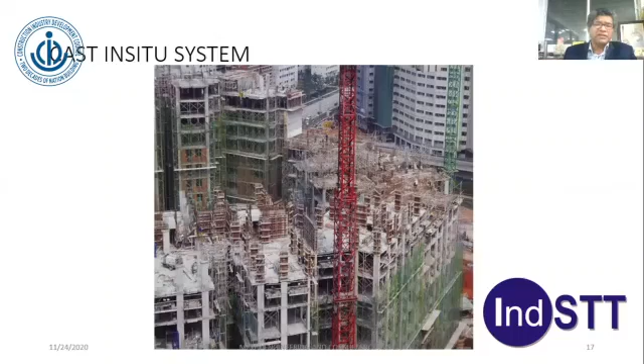Now we move on to precast prefabricated construction. If you look at the cast-in-situ system, you see a lot of congestion happening at the site with formwork everywhere, so much formwork everywhere that you need to do.

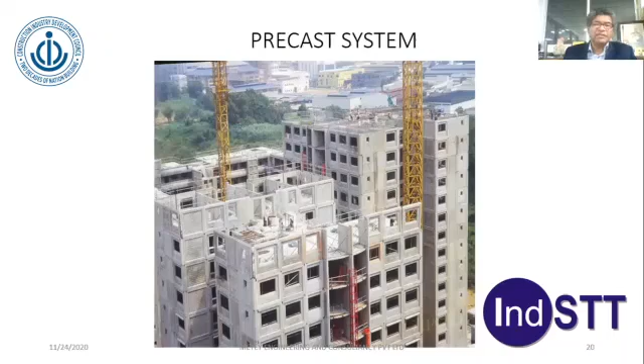But when you look at the precast system, there is no formwork at all, because all these elements are made in the factory and then come to the site and just get erected with the help of small supports here and there.

Looking at precast abroad, I was in Dubai in 1995, and at that time there were only 3 precast companies. I left Dubai in 2005. From 2002 to 2005 huge construction took place, continuing up to 2010 in a big way.

The 3 precast factories increased to about 20 precast factories in the Middle East, and huge construction took place. All those buildings were constructed predominantly using precast, most of them. You can see the facade elements are also in colored pigment concrete, used for the construction.

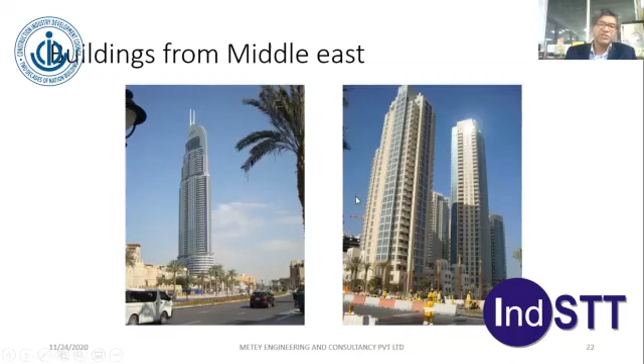You can see mushrooming of towers in the Jebel Ali area towards that side. You can also see industries abroad in Europe especially using even precast for the industrial process, also in concrete.

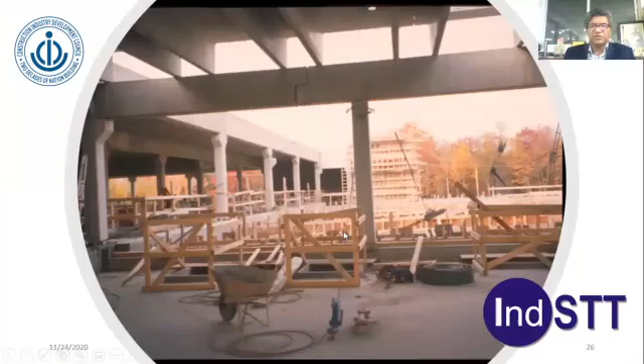The precast slabs are put on that, and you can have sunlight through the glazing provided into that. This is how the precast elements are coming up.

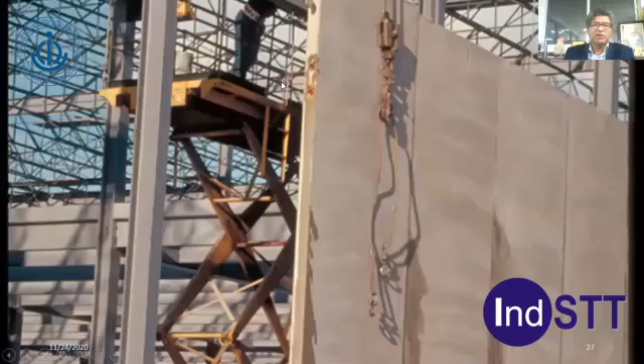You can see that the beam connection is avoided at the junction but coming outside of that, and there is a double T unit here. I will tell you more about the double T slab unit. Precast walls are fixed to the industrial units outside, and then we will look at the precast development taking place.

In Hyderabad you can see a number of industries like this. It's fantastic - so many industries have come up in Hyderabad and Andhra Pradesh.

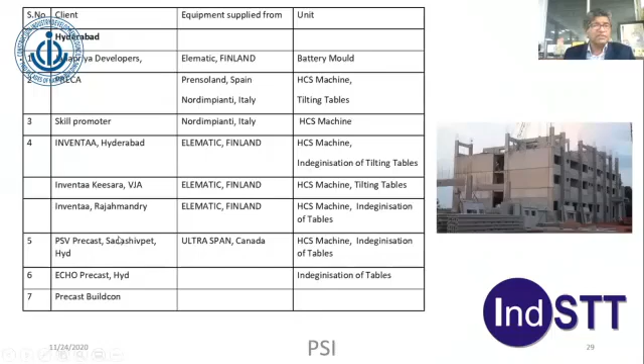In Raipur also, Inventaa has gone there. Raipur BSBK is there. Bhubaneswar Inventaa has set up and is doing a big project for the Orissa Housing Board construction. BSBK has done a wonderful job for the Raipur city using Elematic instruments and all.

In Coimbatore, Teemage Precast has done well, constructing their own structures and now constructing for others also. They have now spread over and recently put up one in Nalgonda of Telangana district.

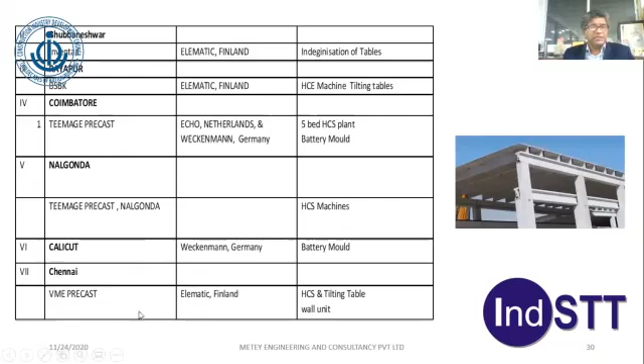In Calicut and Chennai, VME Precast is another very big firm. They have been doing wonderful structures in Chennai as well as Bangalore, doing very big structures, and a big hotel is also built by them. I will show you the details.

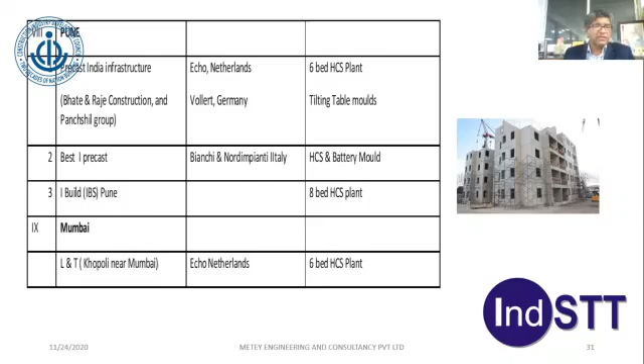In Pune also there are companies. In Mumbai, L&T have done one precast structure. In Bangalore, Gauri Infrastructure and Shapoorji Pallonji have done a wonderful project for Tata Projects. Kattera is now established in a full-fledged manner in Bangalore in a very big way, doing wonderful structures.

Noida, Supertech is one of the biggest factories in a full-fledged way in the NCR region. BG Shirke does their very typical type of different precast construction. They do it for beams also, like a channel, and then pour in situ concrete into that. It is a very special type. Even in columns, they do a hollow shell, then fix the reinforcement and pour concrete into that. That is their specialty.

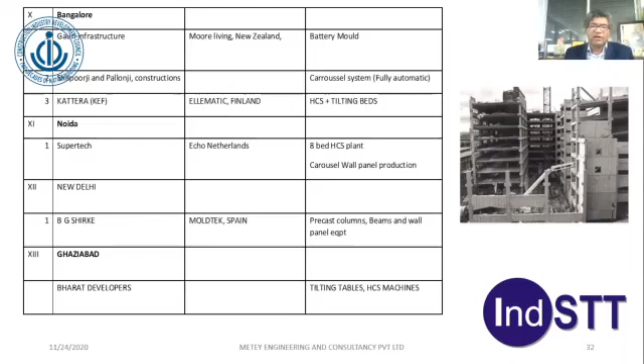And in Ghaziabad, Bharat Developers have done a wonderful project using the tilting table and HCS method. I will show you the details.

Basically, what is a precast concrete structural element? A solid flat slab can be seen as a pre-stressed precast slab. Hollow core slab is a beauty in the flooring system whereby concrete is removed, and at the same time pre-stressing is done. It carries a wonderful load carrying capacity while being lightweight. It will reduce the load on the slabs, beams, columns, and in turn on the footings.

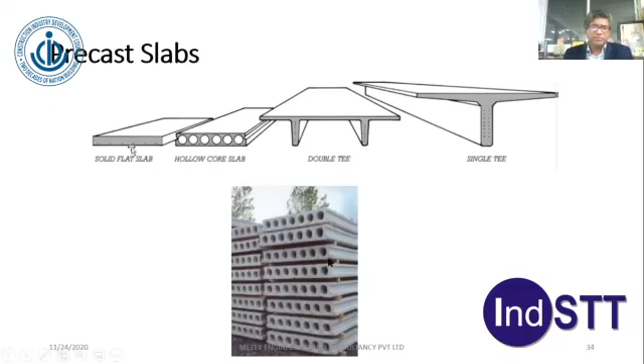Double T slabs are specially used for shopping malls and parking lots where it can span about 25 to 30 meters. Single T can span up to about 20 to 22 meters. These are the different hollow core slabs of different thicknesses.

This is what a hollow core slab looks like. You can see the hollow at the bottom, 30, top also 30, and then the other slab will come here. This is the pre-stressing strand, which will be coming only at the bottom. Each is about 1197, we call it 1200 constant.

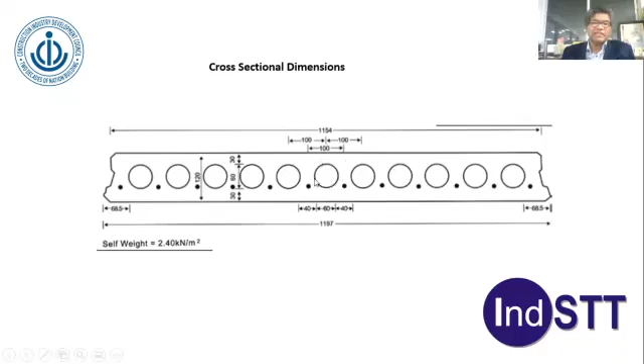Its thickness can be 150, 200, 250, or 300, depending upon the span and the load it has to take. If you see from here to here, it is something like an I-section, it can also be viewed like that.

So when you place a number of slabs adjacent to each other, at the bottom there will be a 2 to 3 mm gap, and then a topping of about 75 mm is necessary. 70 to 75 mm topping will be provided. In some cases, we also provide 100 mm depending on the necessity, architectural considerations, and loading capacities. This grout will go into that.

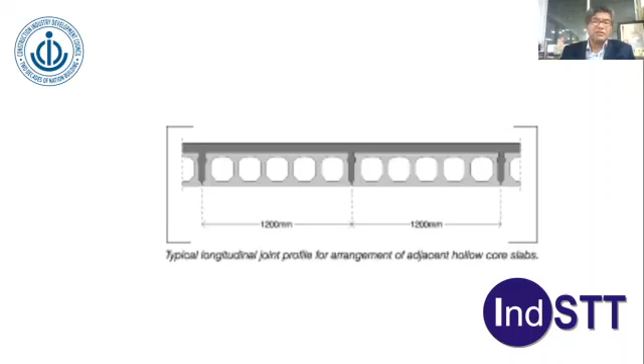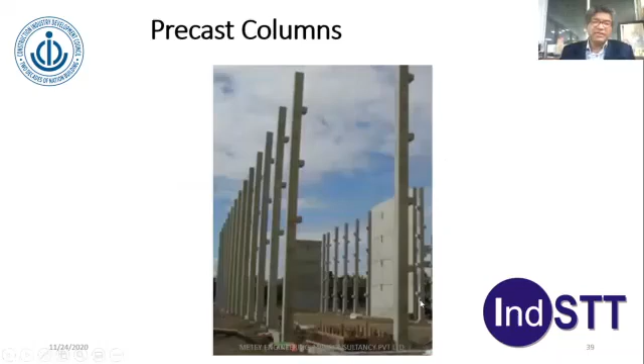You can see precast beams and girders can also be done for buildings. We have already seen this type for bridges also. The beauty of precast is that, especially for industrial structures or buildings, you can make a 3 to 4 story precast column and then join them at certain junctions.

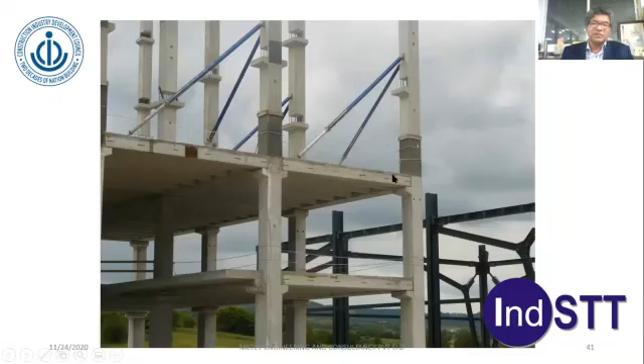In this particular building, you can see a 2-story building joined here, and a 3-story building joined there. At this point, for the beam reinforcement to come and join, they are given an opening and casting is done like that, and it is supported. At this point, the bottom-to-top column is concreted here, and beam reinforcement will come in.

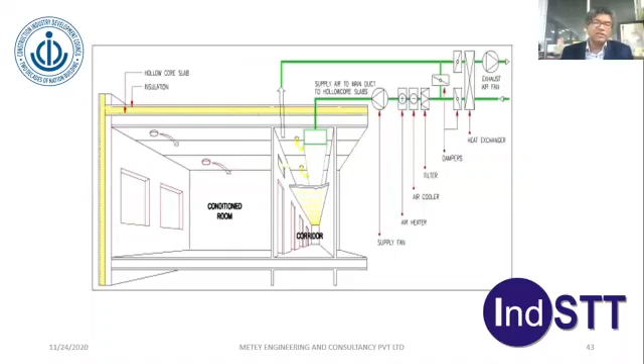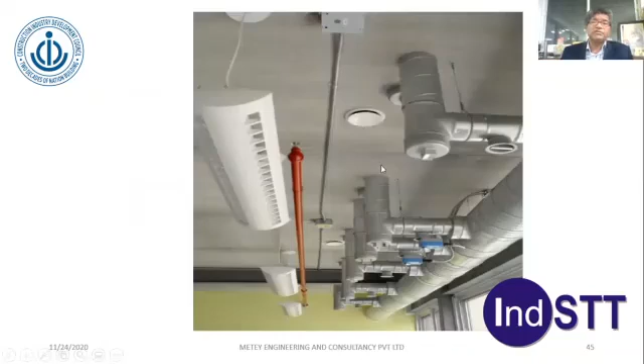This can also be used for air conditioning, though very few buildings have done this. We did one building in Muscat for a shopping mall, Lulu Supermarket, and it is saving their current in a wonderful manner, about 40% of their bill, because it cools more at night when running, and in the daytime the requirement is less. You can fix anything else to the bottom of the hollow core slab, no problem, and we also give a template to ensure the pre-stressing strands are not cut.

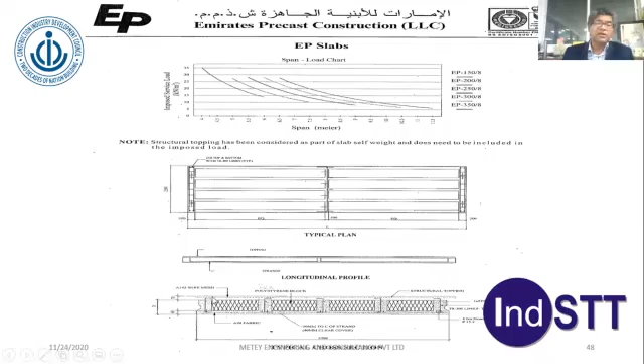There are some connections, and then there is another slab called precast composite slab. This also has about 50 mm thickness, but it will have some beam-like elements coming at 125 to 150, and a shear link will go and join with the topping on top. What you see here designed is polystyrene, used to create the hollowness. So this slab will go there, and then they put 70 mm topping after placing it on the side.

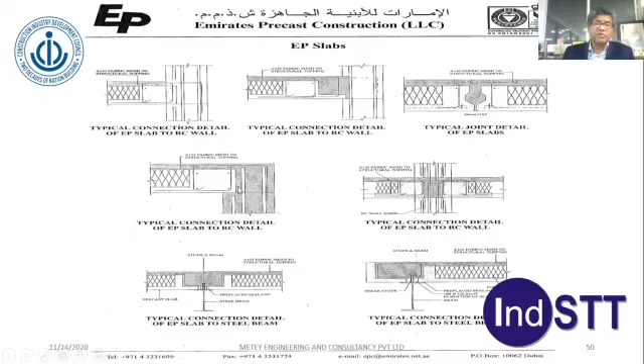This is called the EP slab because Emirates Precast Construction in Dubai founded this method. This is also easier, using pre-stressing strands, and is good enough. You can see some of the connections on the steel beams and RCC walls here.

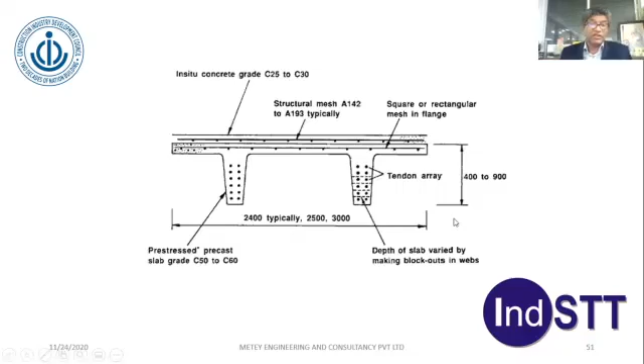This is what I'm talking about, the double T slab. Depth can vary from 400 to 900, and its width, unlike hollow core slab, can span about 2400 to 3000, of whatever size we can create. That is the beauty of it. You can see this double T slab of about 30 meters long going on trucks abroad. We can also make it here, provided we have long trucks, and India is poised to do it.

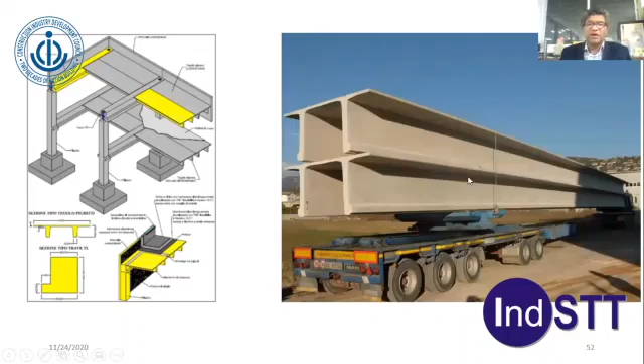We're already doing these double T slabs. Precast India Infrastructure is already doing it. Even Preka has done this for some of the parking structures here in Hyderabad. There's a beauty to it.

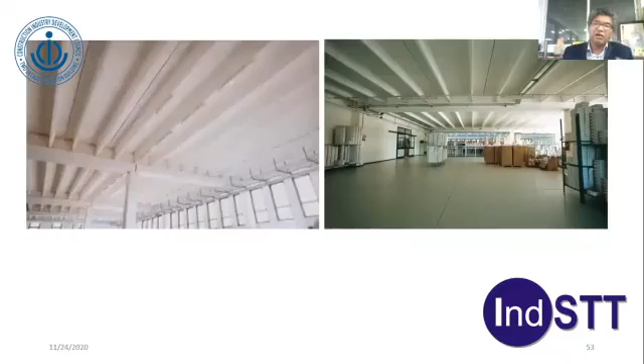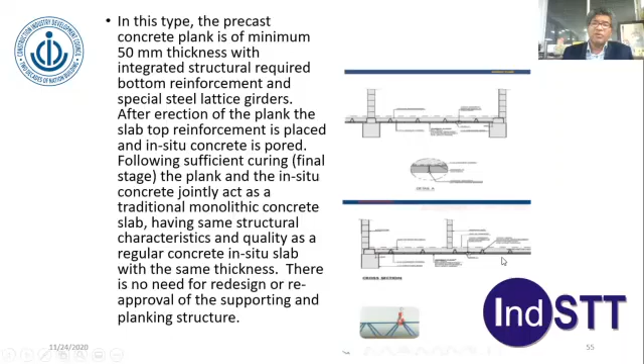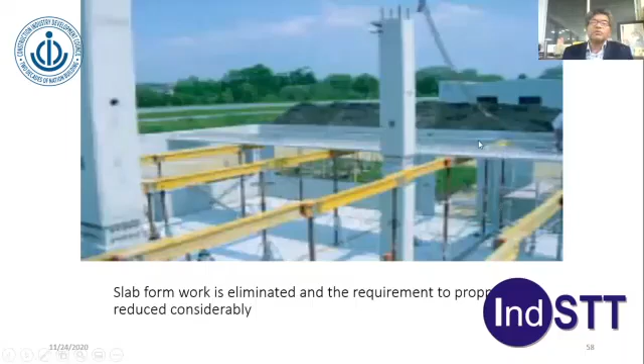There is another type without pre-stressing. This is called a lattice slab, which will do about 60 to 70 mm casting, and then shear links will come up like that. It's called a lattice type system, and after placing it on the supports of the beams or walls, even this can be cast to a long length, but since it's only 70 mm thick initially, it needs to be supported over timber beams. After putting that on the timber beam, you can pour concrete to the required thickness of 200 or 250, whatever we need, such that it won't bend.

Then we'll move on to Ecotech wall panels. These are partition walls with no steel at all, no pre-stressing, no reinforcement. These are all 600 in width and height, whatever we want. We can make it 2 meters or 3 meters. You can chase it wherever you want and put your electrical conduits.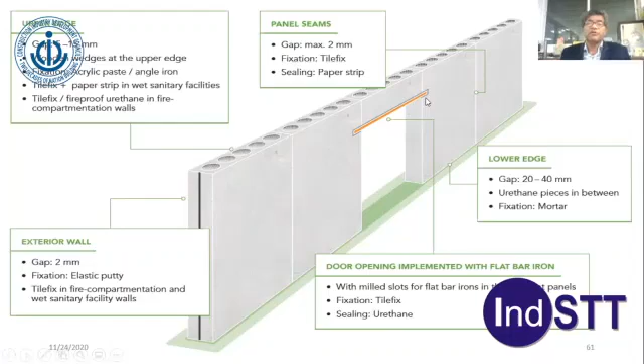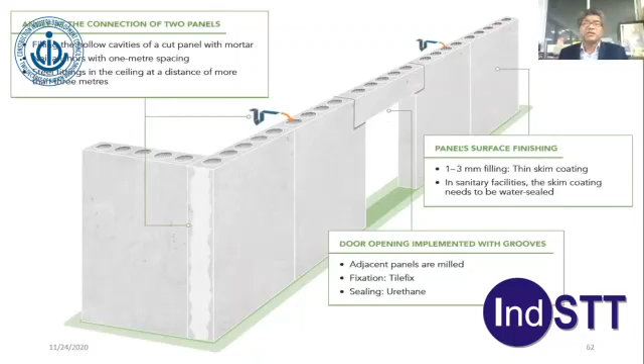The same element can be cut and placed over a channel system as a lintel. That is the beauty of this system, so it can be used directly. You can apply some putty and then do the painting, such that it does not need any curing or anything, unlike brick masonry. So these are some of the details of it.

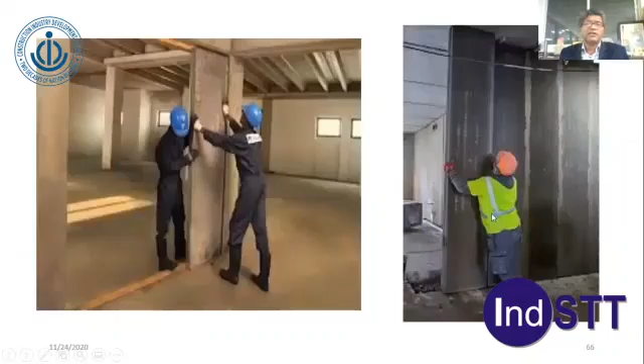This is how the factory made this thing. At least just two persons can erect all these walls, getting it over, and then simply a simple erection can be done using a guided panel at the bottom and at the top. This is how the things work.

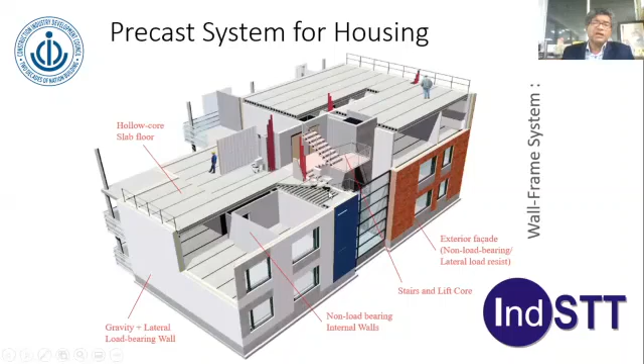Now we'll look at the precast system for housing. Here you can see all precast wall and hollow core slab is put there, and you can also put your precast stairs onto that. For columns, whenever used, you need corbels such that beams will come and rest on that initially, and the hollow core slab can be put such that there is no need to put up extra support.

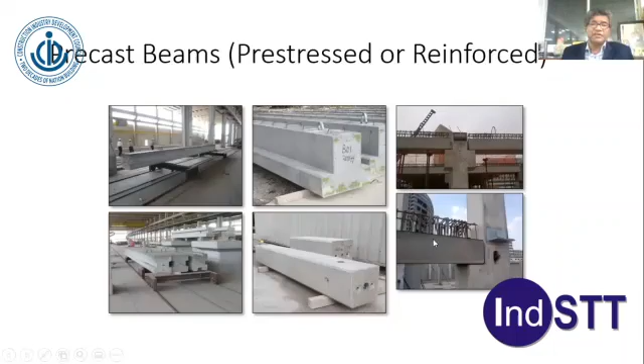You can see here that there is a corbel, with beams coming on either side, and then the hollow core slab. This can be stored like this and then go on trucks in this plant.

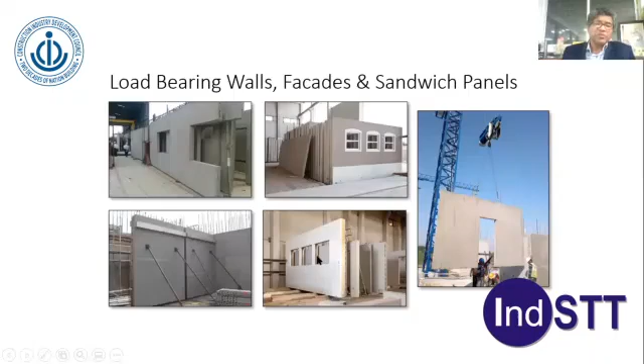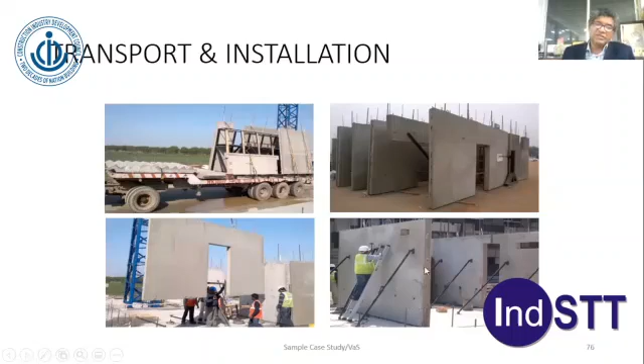Precast wall panels with all the window openings and door openings can be put into this. It's easy to transport and erect. The facade wall panels can also be made in color. You can see that whenever we do that, there are certain dowels coming from the bottom, and these holes will be grouted. The beauty of this is it will stay in position, and then the hollow core slab can be seen.

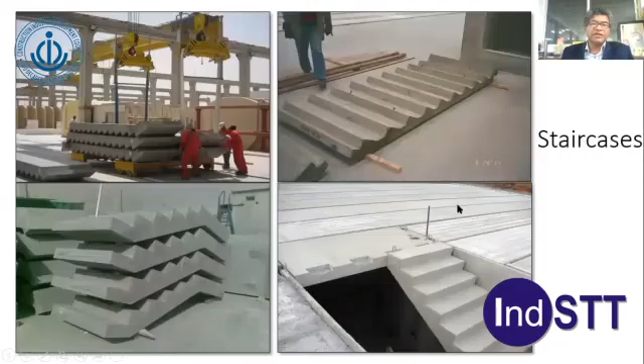Precast stairs are so easy to make with this mold, and these are the magnetic arrestors used for the precast beam concreting and all. This is how the precast stairs are done, and you can see that this can simply be erected on the landing slab.

Landing slabs can also be precast, spanning onto the walls like hollow core slabs. The precast stairs will rest on that with 100 mm support on top. That is the beauty of the precast stairs.

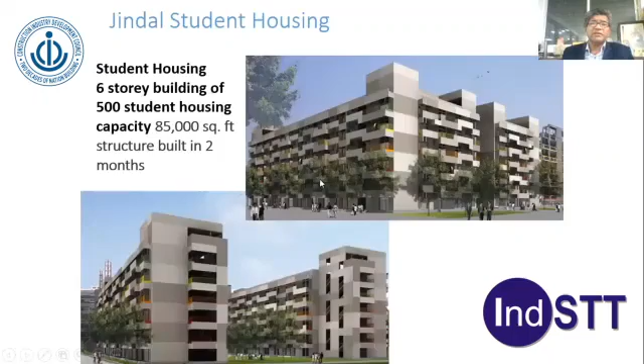We will see some of the precast buildings. This is the Jindal student housing at Sonepat, entirely precast. There was a concept plan, and what they have done is build this, then just done the painting outside along with the railings. They left the building like that. That is the beauty of it.

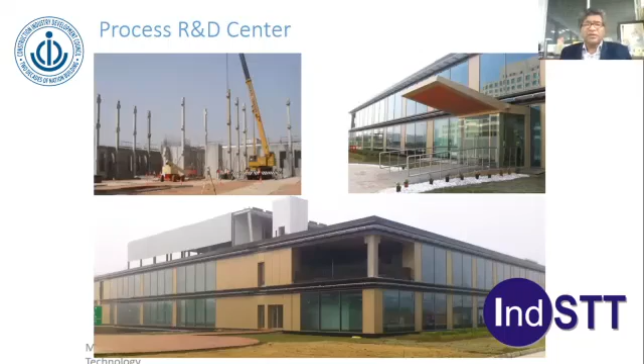This is something called the Process R&D Center, again built by a precast company. You can see this Novotel Ibis Combo built by VME Chennai, a wonderful precast company. Some photographs also show an industrial shed, the TVS Motors factory in Hosur, Tamil Nadu, also built by VME precast.

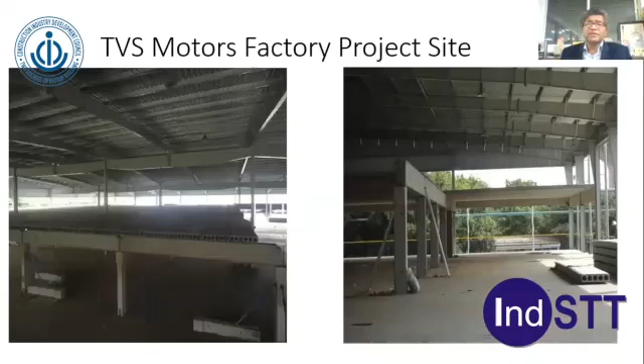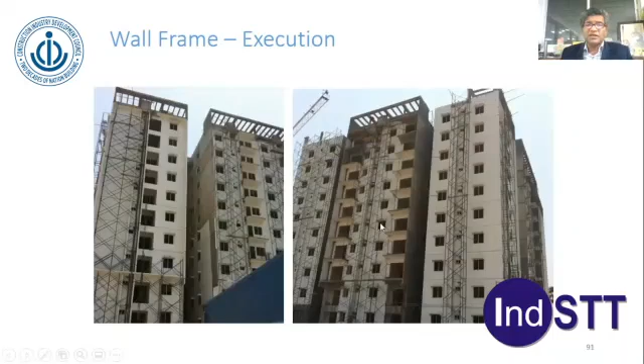This is what I was talking about - Bharat City developers did this in Ghaziabad with precast walls, then put hollow core slab on top. When completed, the buildings look so fantastic with paint - no plastering on top of them, just directly putty and paint.

This is one beautiful building built by India Infrastructure. My friend Ajit Bhate, who does wonderful structures, is a passionate civil engineer. You can see this building - all these are precast elements.

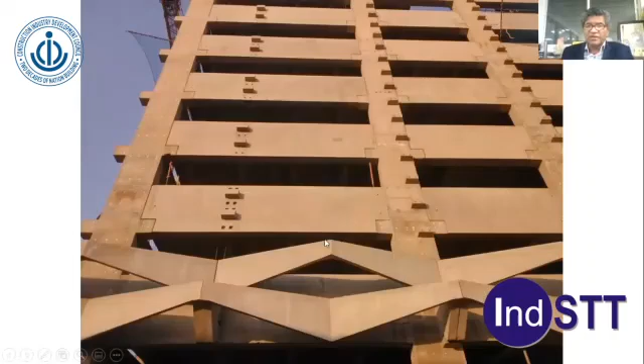You can see these projections out there. To those projections, one concave element and one convex element are added - the architect's work needs to be appreciated. Through this, in the daytime they get ventilation as well as air. It's a wonderful facade element they have used.

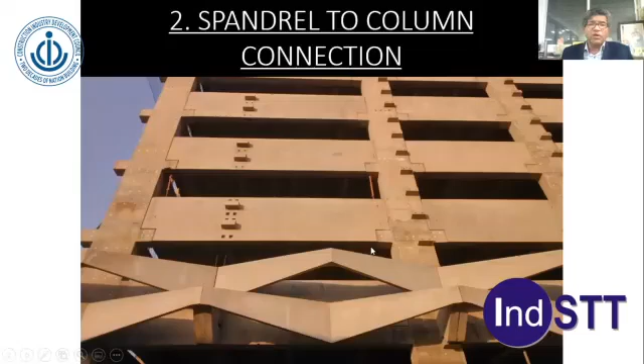These elements get fixed on top of this - see how the fixing is going on, going up onto the top. You can also see that this column has a corbel, with the spandrel sitting on it as a simply supported connection, which is very simple.

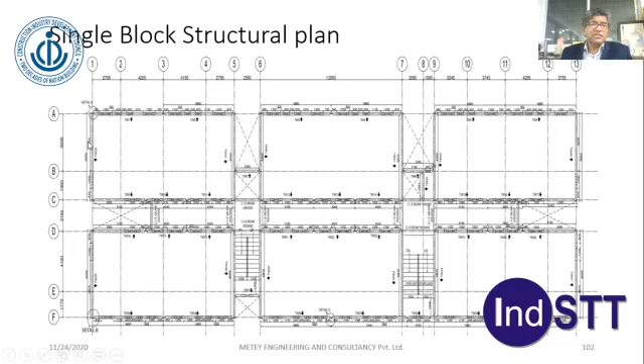Now in Hyderabad, we have done, with Inventa Industries, PSP Precast and Eco Precast, a stilt plus 9 floors project for the Telangana state government completely in precast. This is done such that precast walls and hollow core slab sit across on that. All the internal walls are supported on the precast hollow core slab, and then erected - that is the beauty of the system.

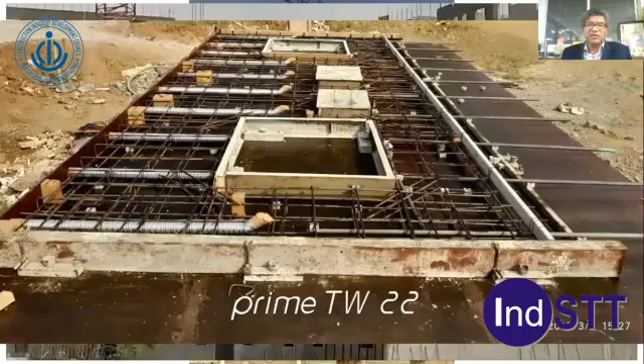You can also see on site itself, on the table, they are casting the precast wall, with all the sleeves going to the dowels which are coming there, and then they are grouted such that it is rigid. These are some photographs from the GHMC Dundigal site.

The main contractor is IJM, and the subcontractors are Inventa, PSP Precast and Eco Precast, all from Hyderabad. They have done this wonderful structure.

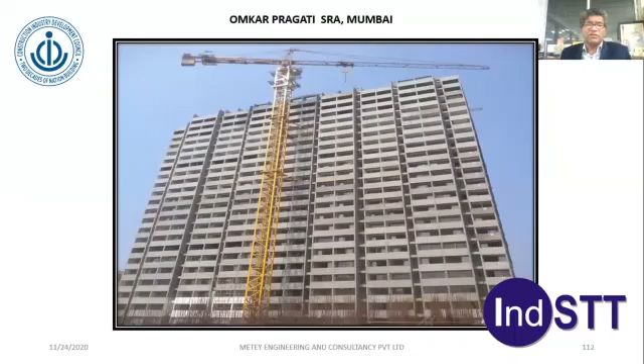Omkar Pragati, SRA Mumbai, have done this wonderful structure up to 20 stories in 1 year's time. They have also done it such that the toilets are precast and then directly erected on top of that - so there is a beauty to it.

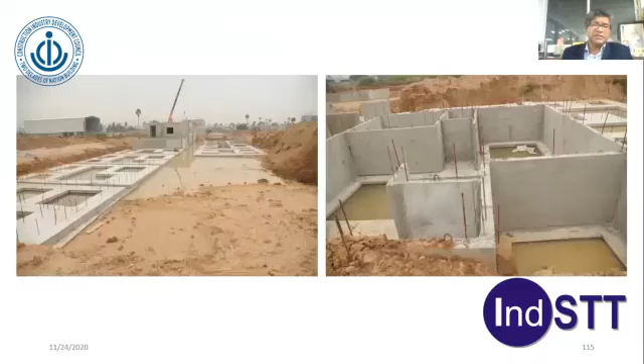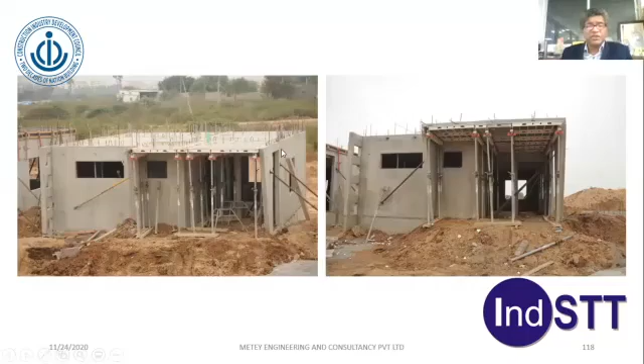Precast was started by Janapriya way back in 2010. Except for the foundation, they have got the walls and everything in precast. But they did the slab at that time with a PT slab - they could not go for the hollow core slab, so they used the PT slab. This is how these villas are done.

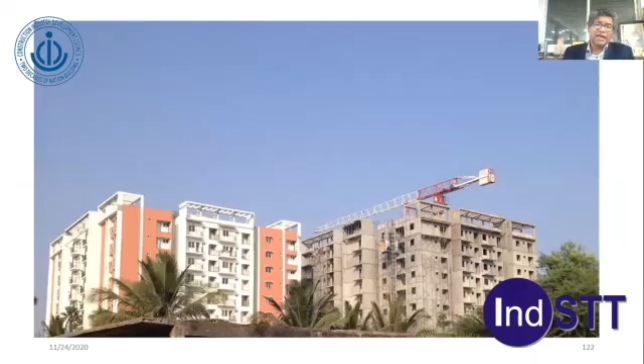They have also done a 12-story structure, with about 10 apartments per floor, at the same construction site. They delivered these towers in 1 year's time, as against the usual 3 years. They have really done well.

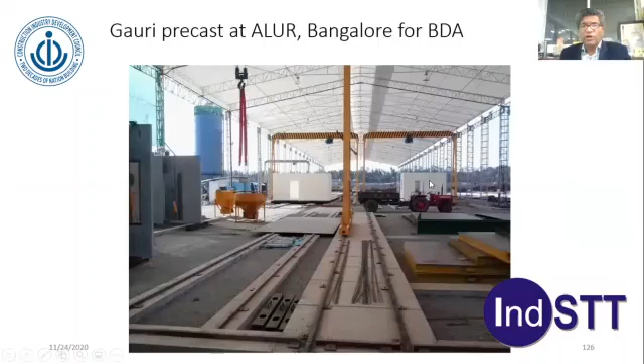BDA Bangalore - they have done all the precast walls and the bottom slab, erected and assembled everything including walls and painting, all done. This is moved out through rails, lifted, and placed on top of one another, so it is going well. This is the brief introduction to the whole development of precast.

Precast is shaping wonderfully well across India, and more developers are choosing precast.